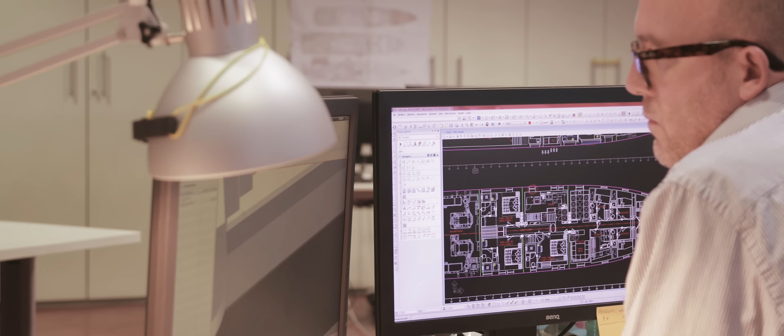Viareggio has been the historic home of this world-famous shipyard, and it sometimes seems impossible to meet a super yacht captain that has not spent at least some time in his career here. Despite the built-up, sometimes quite chaotic nature of the town, Benetti have been able to develop an impressive production facility here, and they are unrivaled on the world scene for the breathtaking number of yachts they produce year in and year out. The Azimut Benetti Group has in fact been the world's #1 yacht builder for 18 years now.

Now you might think that I'm going a little bit over the top in describing this production facility as breathtaking. It's impressive, yes, it's big, yes, but breathtaking? Well, I use that word because this video is not about that production facility. This video is about a production facility that Benetti have that remarkably is not as well known as the one they have in Viareggio. I'm here to tell you about the other one that they have down the road in Livorno.

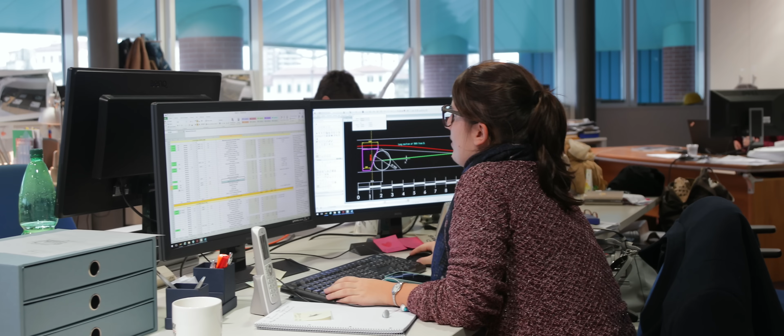The scale of this facility is like nothing I have ever seen in the yacht building industry. Walking through the gates of Benetti Livorno is like entering a kingdom of super yacht construction, a highly organized dominion dedicated entirely to the conception, development and realization of some of the planet's most impressive expressions of luxury living on the water.

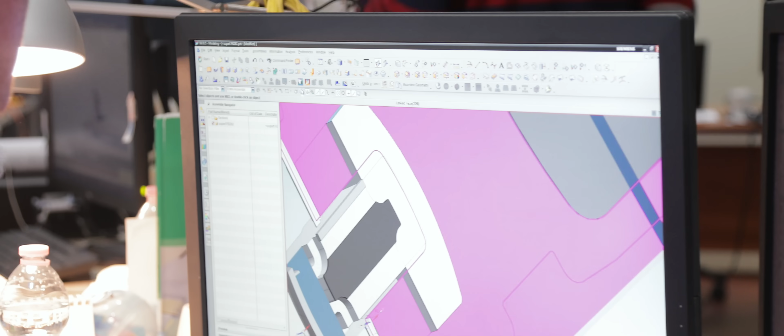Here, an environment has been nurtured to allow naval architects, designers, mechanics, electricians, pipe workers all work together in a friction-free spirit of collaboration, united by the goal of producing excellence.

The choice of Livorno as a venue for this City of Super Yachts was not left to chance. Not only was a sizable piece of land available right next to the ocean here, but it was also very close to Benetti's hometown of Viareggio and, more importantly still, a rich culture in the building of some very sizable ships. The shipbuilding industry in Livorno actually goes back over 100 years, and the Benetti facility includes original artifacts from the Orlando Brothers shipyard that was building ships such as the 125-meter-long ironclad Lepanto as far back as 1876.

You just can't buy this kind of shipbuilding history that runs through the veins of the people of this city and now finds expression in the construction of luxury mega yachts and impressive giga yachts. After nearly 25 years in the yachting industry, when I read the word giga yacht, I tend to roll my eyes, expecting to see some ridiculous design the size of the Death Star that will never actually see the light of day. But when I read the word giga yacht next to the name Benetti, and in a shed the size of this, now that is really exciting.

And this is the smallest of Benetti's 3 giga yacht sheds, each one capable of building luxury yachts of over 100 meters in length, and each one full to capacity. The production facility of Benetti in Livorno includes not only 3 giga yacht sheds, but also 4 mega yacht sheds, capable of building 8 yachts from 50 to 70 meters in length contemporaneously.

This is a billion-dollar super yacht city with a head-spinning array of yachts of various sizes and designs, and in various stages of construction, so that even the docks are full of yachts in the water being sea trialled and fitted out with the final touches.

Coming from a yacht building background, I can tell you that the timing of when a yacht leaves the shed and gets launched at the dock is absolutely critical. You see, the longer the yacht stays inside, the more efficient the process is. Workers can get easily on and off. They have their tools and they have their materials readily at hand. They're in a controlled environment with dust extractors that's not affected by the weather. It's all so much more efficient.

However, certain systems can only be tested once the yacht has been launched because they need seawater to work. The engines, the generators, the air conditioning, you can't test them until the boat is in the water. Except at Benetti, you can.

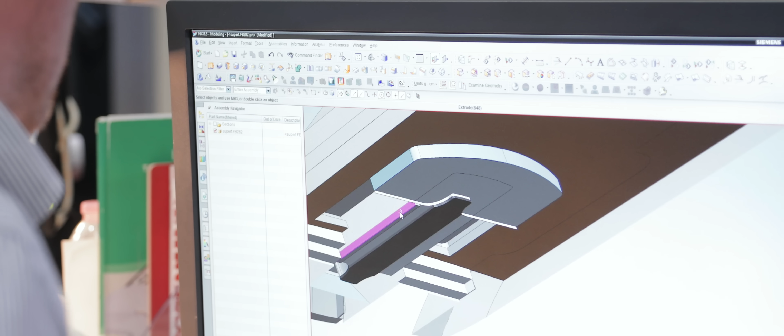But that's just one of the innovative industrial approaches that the company have taken to allow them to grow in their production capacity. This is the beating heart of Benetti's Livorno facility, a collection of highly talented individuals whose sole purpose is to turn a yacht buyer's dreams into reality. This may seem like a glib expression taken directly from a page of advertising in Boat International, but remember that the yachts built in this facility are fully custom builds.

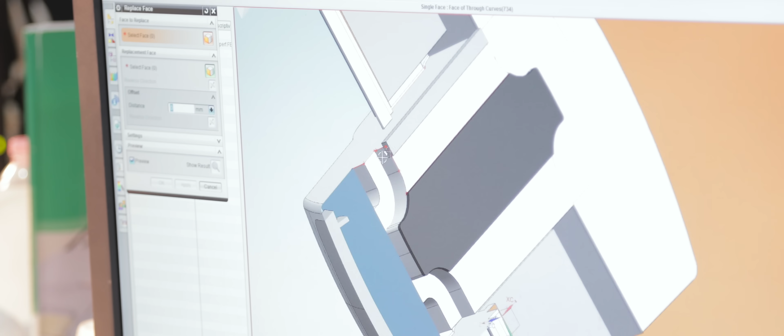So in most cases, a team of specialists has to literally take a project from an idea on a piece of paper through to a workable design with executive drawings and onto cut and painted steel with bespoke furnishings and an engineering package that will guarantee high levels of performance and seakeeping ability. Benetti have done everything they can possibly think of to make this complex and challenging procedure easier and more achievable, including dedicating areas of the super yacht facility to key suppliers so that they can have offices and materials here.

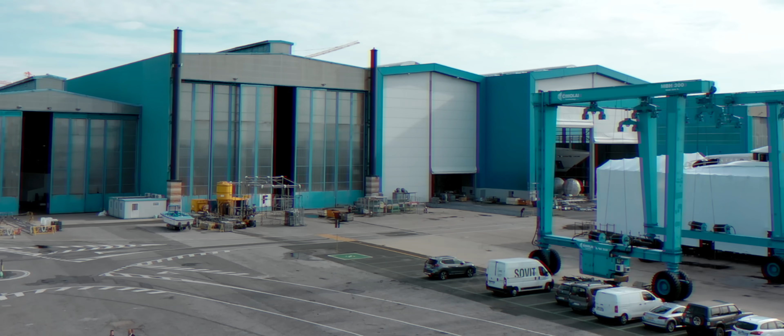With just about every other builder I can think of, suppliers have to drive in and out of a shipyard with their materials and with workers, returning to the yard time and time again as the project develops. By providing them with premises within the walls of this super yacht city, they make their jobs so much easier, and as a result, the finished yacht can be built in a more efficient manner.

As a further tribute to Benetti's industrial approach to super yacht building, they recently appointed Franco Fusignani as their Chief Executive Officer. With 45 years of work at the mighty Fiat automobile company, he knows a thing or two about managing large production facilities. There's a real sense of momentum here at Benetti. They have a new CEO, they have a new Chief Commercial Officer, and they have a new country manager for the Americas.

Actually, when I first came here to make notes for this video, I sat down with Signor Fusignani, the CEO, and it was absolutely fascinating listening to him talk about how a company the size of Benetti uses truly industrial methods whilst retaining the need for skilled craftsmen, so that each super yacht that they build is totally different from the other. He explained to me that you can divide the suppliers for a super yacht into 25 different categories. So you have electricians, plumbers, metal workers, cabinetry makers, and so on.

Benetti then have what they call a vendor rating table for each one of those categories. So if you supply electrical services for Benetti, for example, you may be one of 6 or 7 different companies that all supply that same service. The vendor rating table will mark you according to the quality of your work, the technology that you use, how cooperative you are, because things don't always go as planned. So how have you cooperated to be able to get the job done?